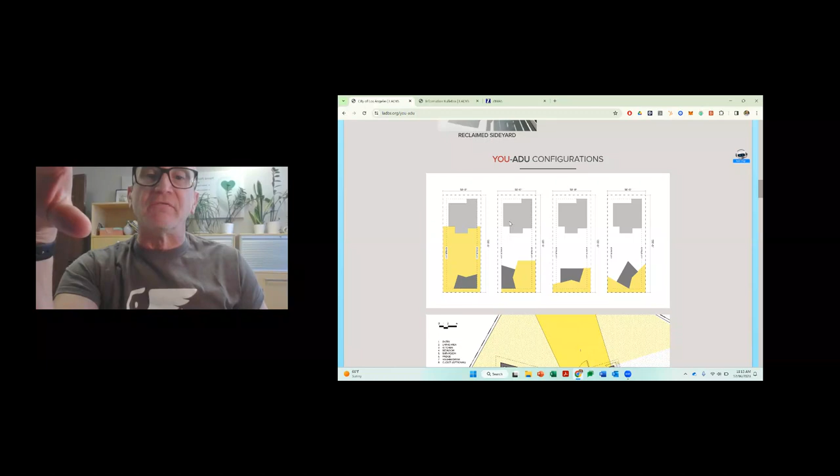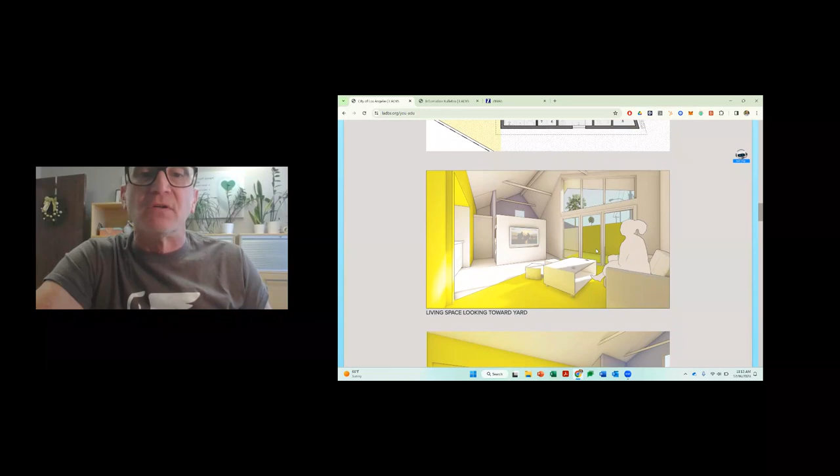This is kind of an interesting look. I've got these angled walls, kind of nice, I like it. You can see what the different rooms are and what they're used for—bedroom here, things like that. It's got this little key here, the main entry, the living area, some windows, and the closet, which is optional. This is what it looks like from the inside. This is what they are expecting that you will provide and build when you use a standard plan.

Some people don't like that, so they have other standard plans that have been adopted. And if you choose to go with the standard plan program, you can choose any one of these. Right now there looks to be about 60 different—no, even more now, 76 different standard plans. And you can choose these.

I'm going to look at ADU 76. This is from Mini-Homes, LLC. This tells you a little bit about the company and how you get a hold of them and how you can purchase this standard plan. The reason I like this one is it's under 500 square feet, and we'll get to why that's important in a bit.

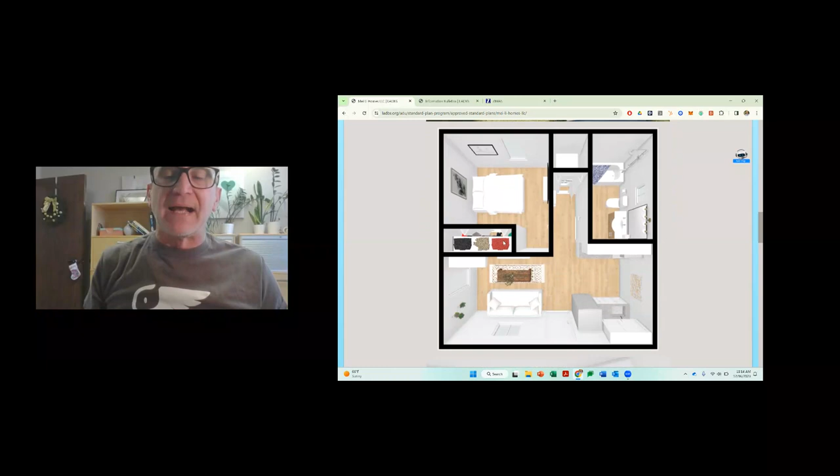It's pretty basic, just shows exactly what you need. You've got a bedroom, a little laundry area, a bathroom, and a small sitting area with a small kitchen.

So, very efficient little unit. It's got a little TV area here as well, too, so you can get a good sense of what these things are.

This is what an LA standard plan is. When you choose that standard plan and click on the plans, this is where you'll actually see the plans. You'll get the description from them, and they'll have all of the items you need for submittal in your plan sets. That is the benefit of using the standard plan submittal program - you don't have to worry about creating from scratch all of these different items you need for the plan check review. They will come with you.

So once you've developed your plans, whether you've chosen a standard plan or you're developing your own, you're going to go through the plan submittal process, which is through ePlanLA. That is an online portal that you can go to, and you have to submit and get yourself set up.

I wanted to show you some more information about what needs to be on your plans. The City of Los Angeles has a document submittal requirement sheet for new ADUs that have to abide by the standard plan document. The trick is that this is the suggested minimum document submittal requirements, including architectural and structural plans, calculations - this really needs to be for anything. So whether you do it by a standard plan or your own plans, this stuff has to be on there regardless.

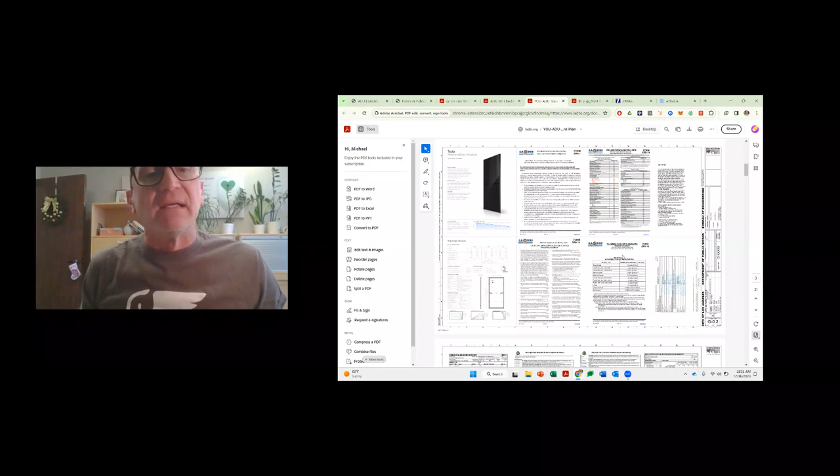Here's the CALGreen forms that you need to have - this one's required here. The CALGreen plans will have these forms, and those have to be filled out, as well as these different Title 24 documents. We mentioned Title 24 - that's what's going to go here. You see each page is separately called out here on these different pages.

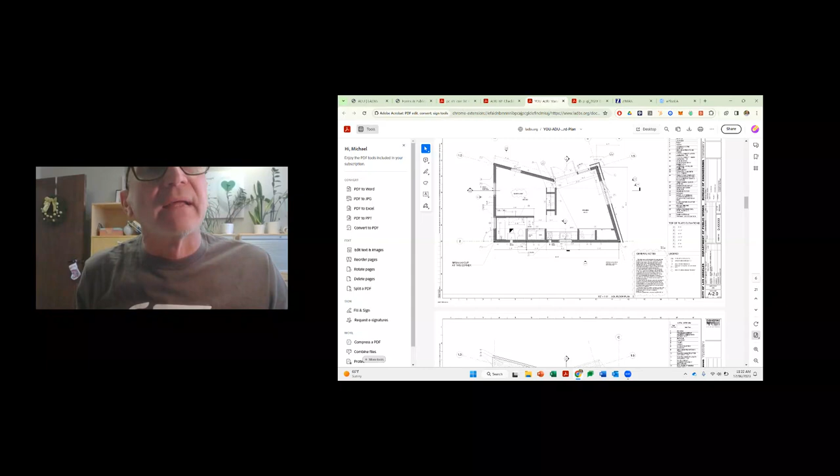Here's the floor plan with the different dimensions on it, and this is how they call it out here: sleeping area, this is the studio, here's the kitchen area. There's the general notes that they need to have, and what each of these different numbers shows - like a colored epoxy and what the faucet is here. This is going to be what's called your roof plan.

This shows the materials of the roof and how it's constructed, along with the solar area. Here's what the exterior elevations look like, showing exactly what it's going to look like from the side.

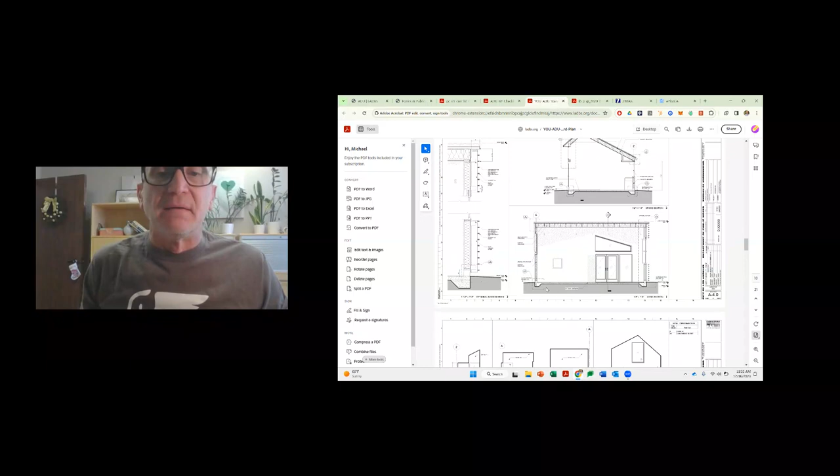This is the framing plan. Each one of your drawings is going to have these things. This is the foundation plan, showing how it sits on the foundation, and then the trusses as well, and what they have inside them. This is the interior walls, the bathroom walls, and the windows, and what's going into this living area.

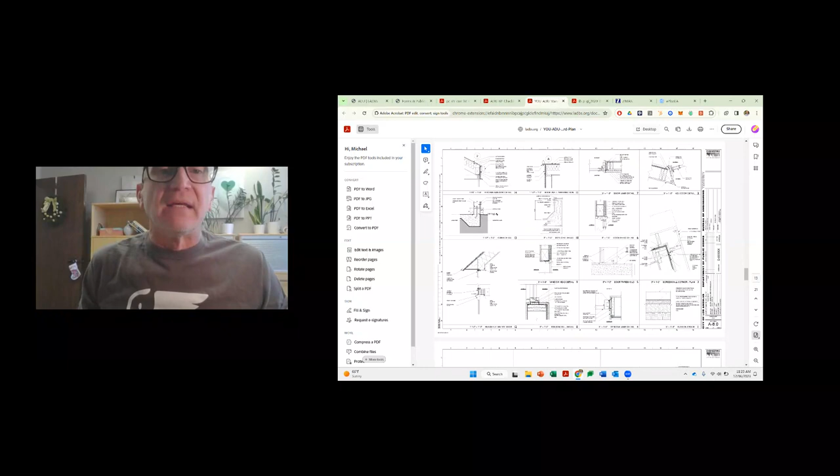This is the different windows and the door schedule, so they know exactly what window is going where. It's like a big giant Lego puzzle. Here is the connections with the doors, any skylights, any curb details. These are the different details of how these things are being put together.

Again, this is all part of the standard plan, so this has been pre-approved by the city. Once they see that you're using this standard plan, it helps the process go a lot faster.

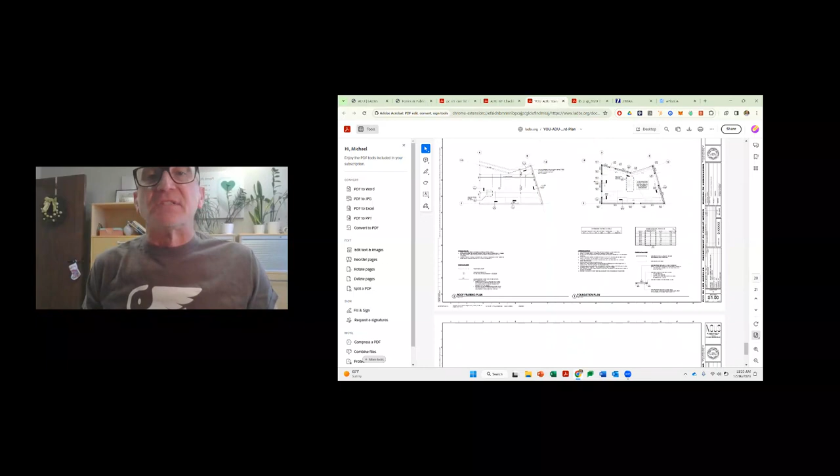Here's more. Here's the stud walls for non-load bearing, and here's the shear wall penetration. This does have to be stamped by a licensed engineer, so they know it adheres to different seismic requirements. Here's the foundation plan and the roof framing plan showing exactly which goes where, and the wood schedule as well.

So that is what the standard plan has, and this is what the standard submittal requirements require. That will help you get through that process.

Next, we're going to go to the ePlan submittal process.